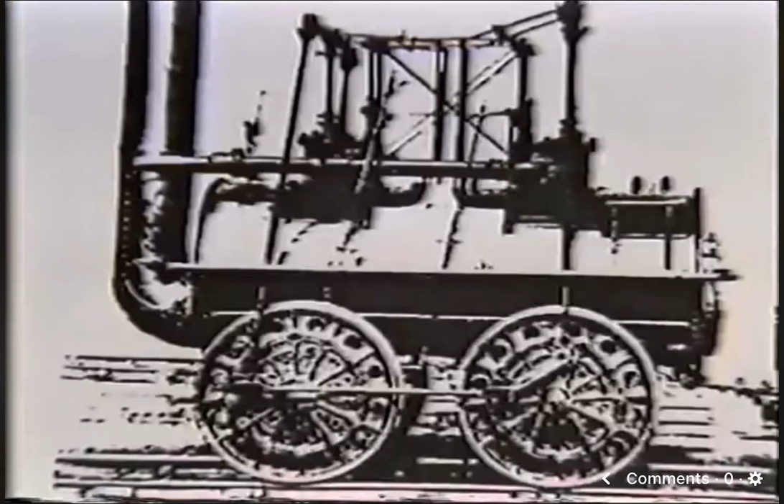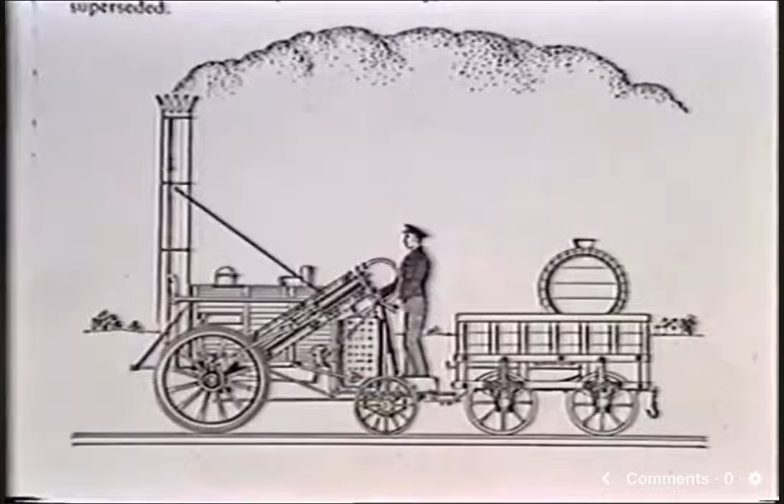Steam. Energy first harnessed more than 300 years ago and refined by George Stephenson and Richard Trevithick to produce the world's first steam locomotives. Stephenson employed John Dewrance as chief erector of his world-famous rocket, and together they made railway history at the Rainhill Trials in 1829.

From pioneering steam locomotion, John Dewrance formed his own company and set about designing valves that would allow steam to be controlled with even more flexibility.

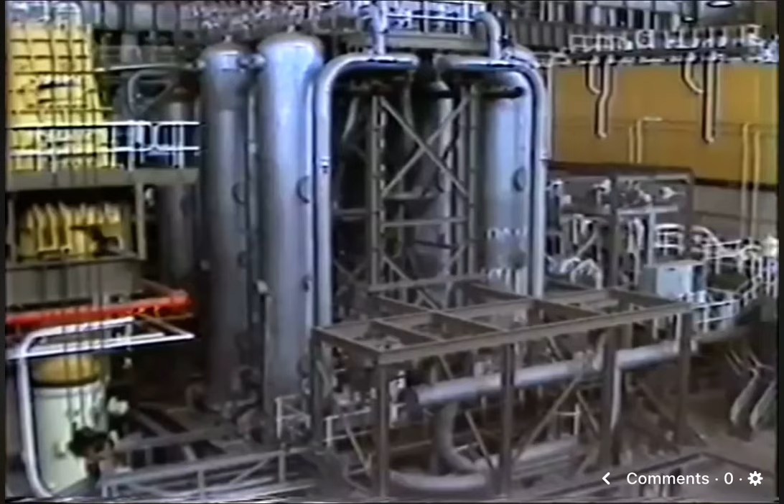Today, the company continues in the pioneering spirit of its founder, and all over the world, people who use steam reap the benefits of his engineering brilliance. This power station, for instance, relies on Dewrance valves for safe and efficient operation, providing the vital energy that lights homes and keeps the wheels of industry turning.

The social responsibility that Dewrance carries to ensure that accidents do not happen is high indeed, and it's demonstrated by a total dedication to quality.

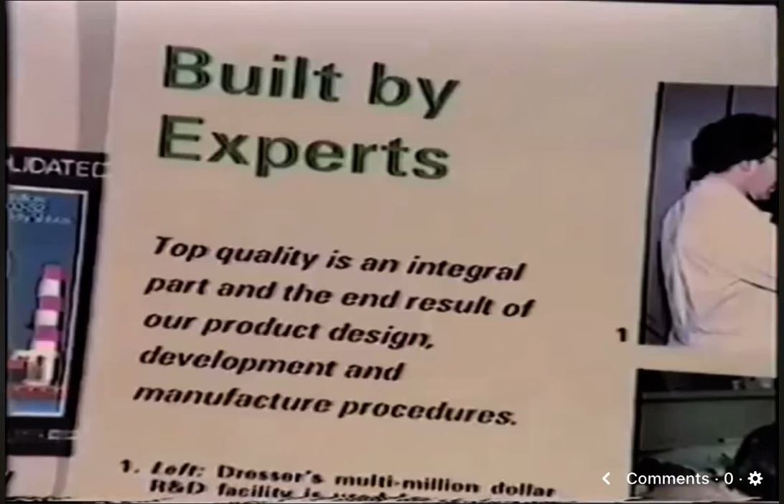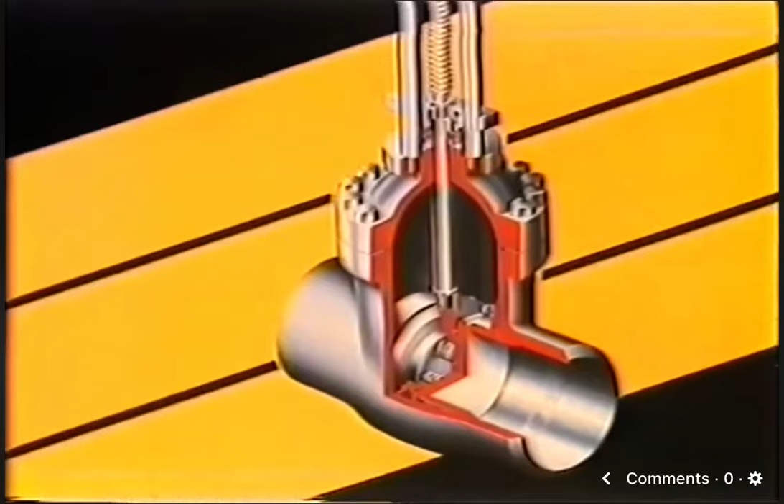From the foundations laid down by John Dewrance, the company has developed a variety of globe, check and safety valves, as well as a range of parallel slide gate valves that now lead the world in quality and reliability.

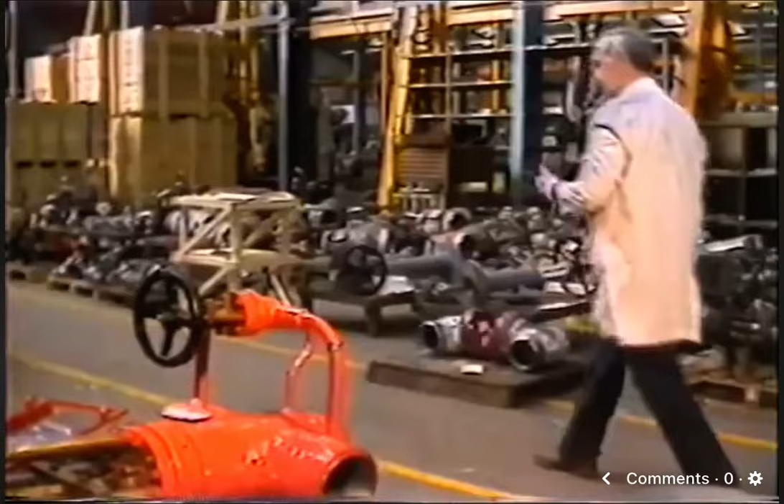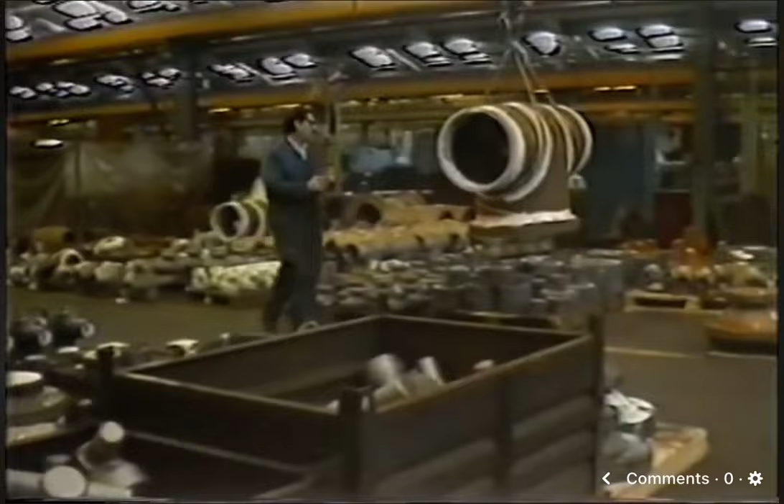It is here, conveniently located alongside one of Britain's busy motorways, that Dewrance are pushing the boundaries of quality assurance to their very limits. All their products are precision instruments made of the finest materials that leave no room for compromise. Dewrance quality assurance begins with the selection of those materials and continues right through the manufacturing process onto installation where needed and on-site service.

This then is Dewrance.

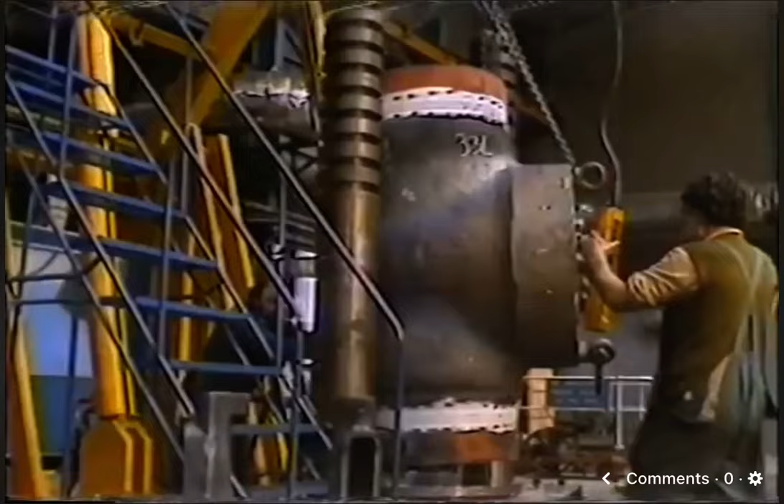Dewrance is now part of the US-based Dresser Group. As such, it belongs to a worldwide organization that specializes in energy-related products, a recognized world leader. The care that goes into the making of Dewrance valves ensures that the company stays at the top.

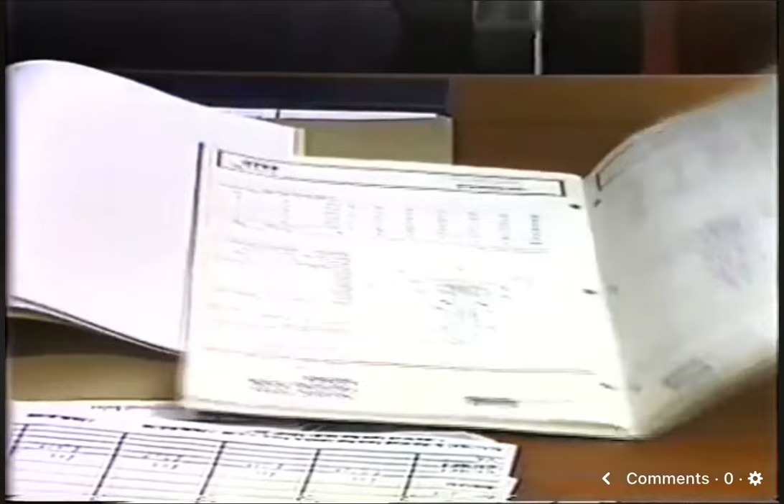A care that starts with the way in which Dewrance deals with its customers. It continues into the design office, where the customer's specifications need to be precisely interpreted into working drawings.

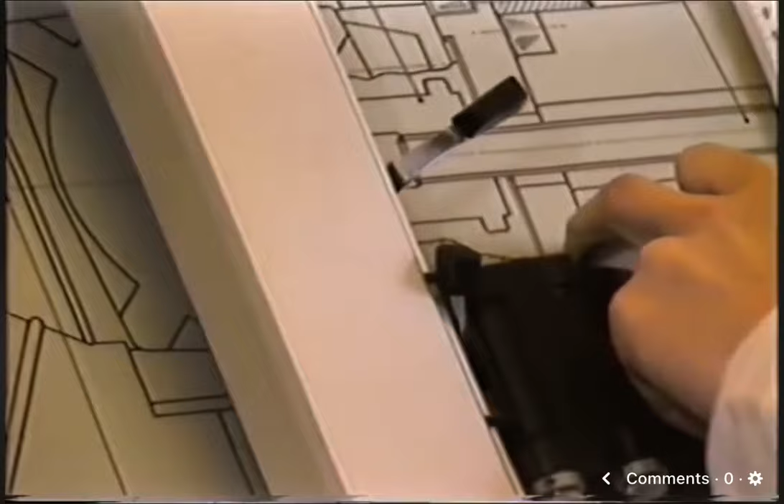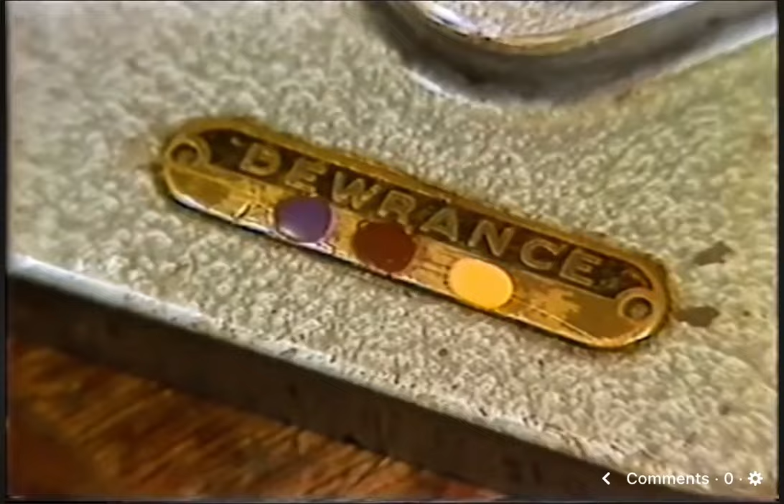And it is evident in the careful calibration of the testing equipment that ensures that each stage of manufacture is checked and double-checked. A simple, fail-safe color coding system ensures that nothing misses its turn. The standard is laid down by the National Physical Laboratory and strictly adhered to.

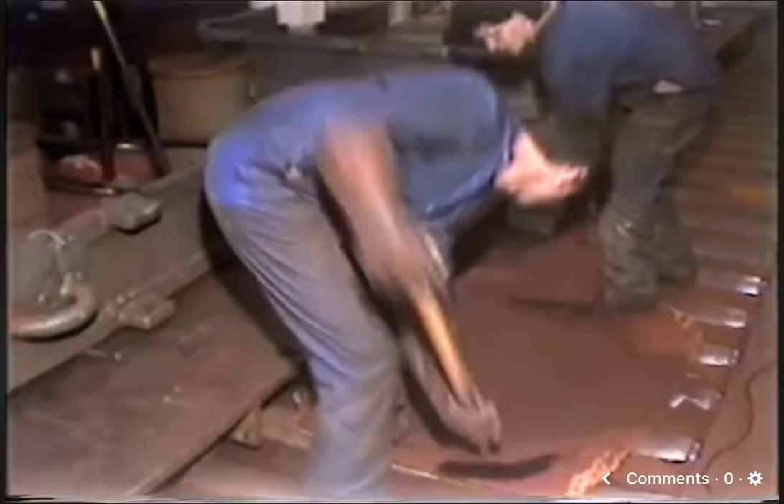Dewrance is a company that keeps all principal manufacturing processes in-house, with just one exception. This is for castings and forgings, and the Dewrance standards are demanded even here.

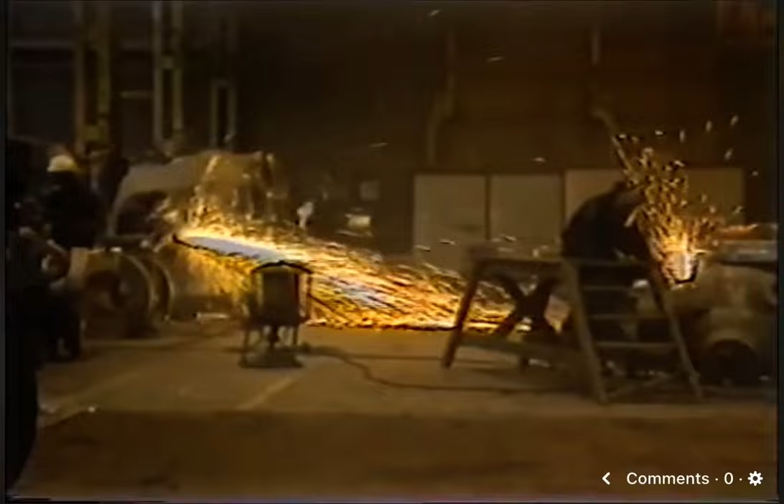The foundry that produces these castings has a reputation for matching those high standards. This area is dedicated to Dewrance castings, and before Dewrance will accept them, they have to go through rigorous and painstaking testing procedures to ensure they're of the right quality and standard. This includes the full examination of the body and bonnet.

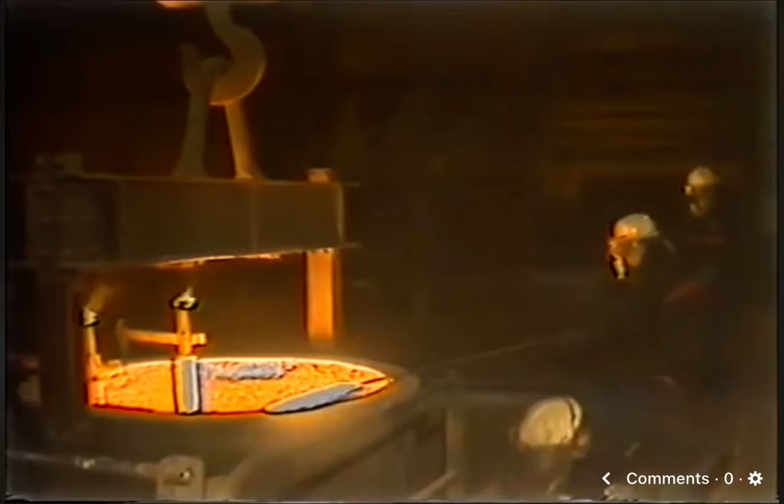Quality can be assured at the foundry, or where a commercial quality casting from stock is to be used, Dewrance has its own facilities to upgrade to the highest levels of non-destructive examination.

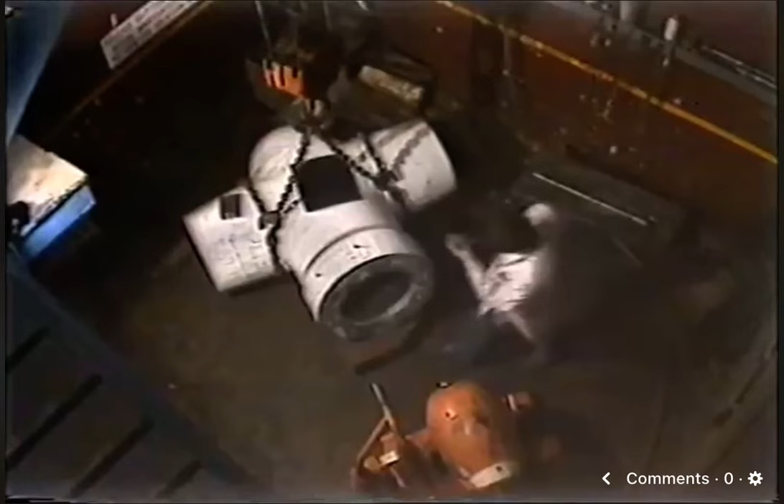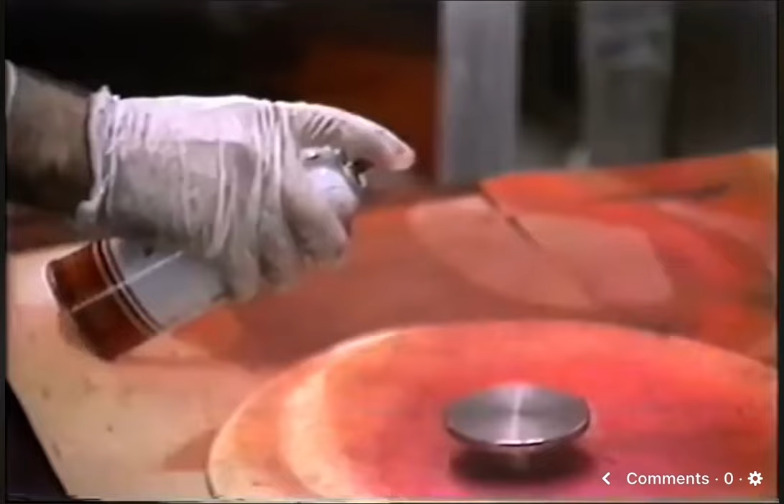Radiography is part of that non-destructive testing program. Ultrasonic testing is also used, as is dye penetration surface testing and magnetic particle testing.

But it is pure skill that ensures this operation is successful.

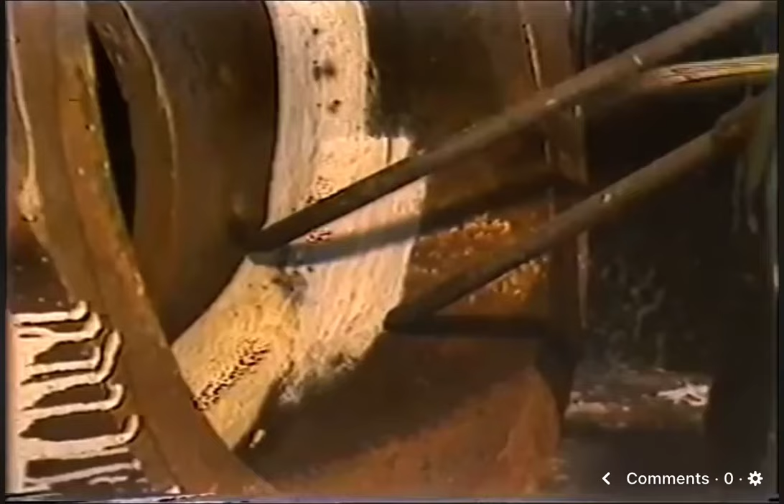The care that Dewrance takes in the manufacture of valves shows itself also in the company's commitment to investing in state-of-the-art computer-controlled machine centers and CAD/CAM facilities.

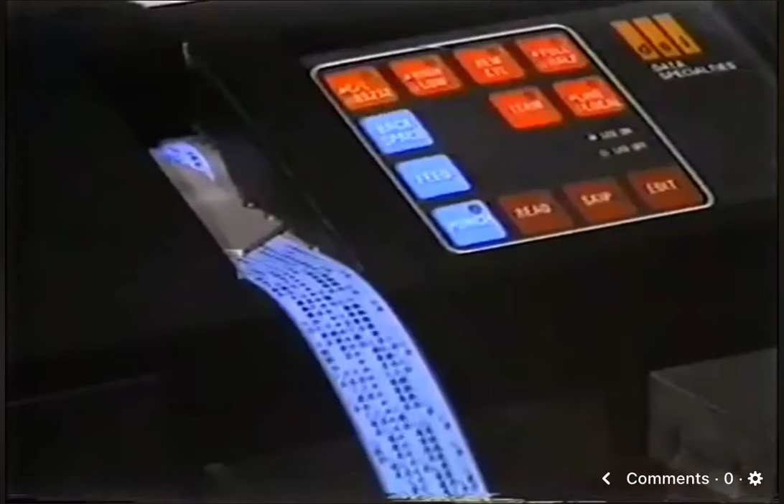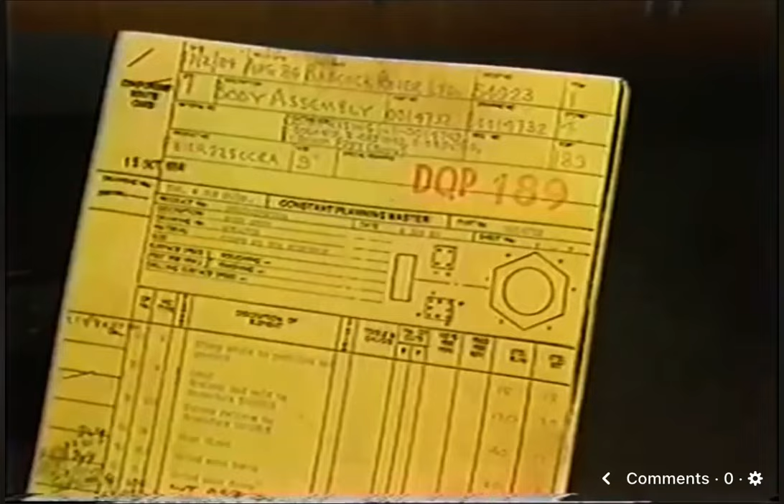It's in manufacture and testing that Dewrance has achieved excellence and a worldwide reputation for products that have built-in quality and reliability. A route card system ensures that every job is inspected at each stage. It means the job cannot continue through the manufacturing process unless authorized by an inspector.

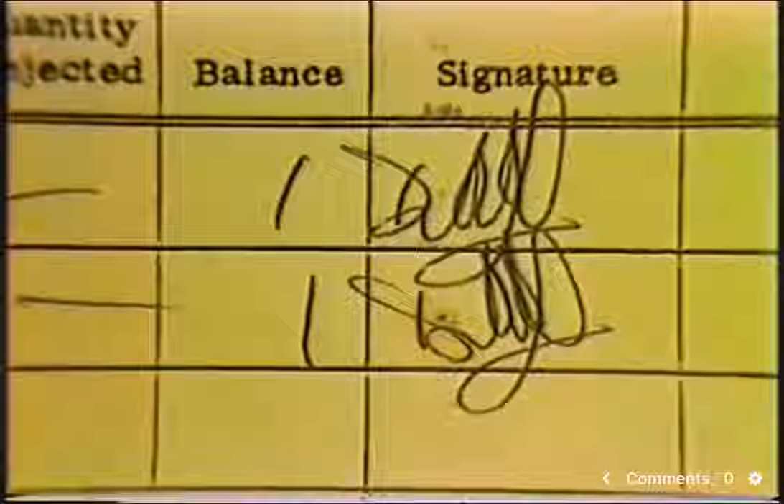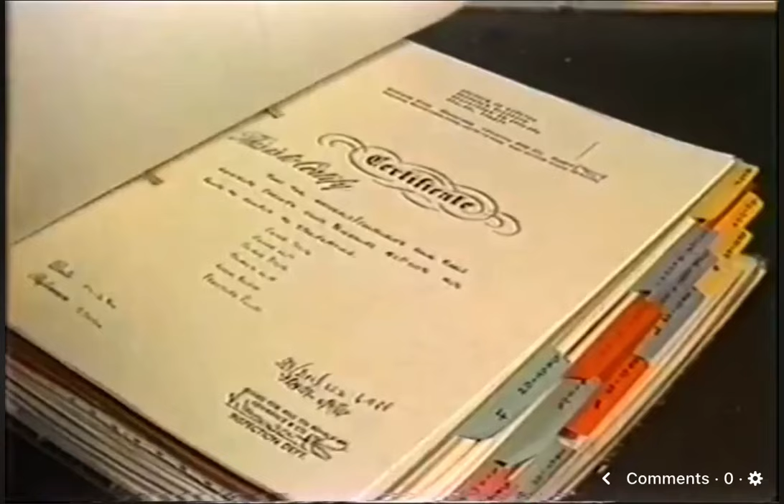Documentation for each and every part is a key element in Dewrance quality assurance. It's considered essential for Britain's Central Electricity Generating Board and Ministry of Defence, renowned for the high standards they demand from suppliers. It's comforting indeed for customers to be able to follow on paper every stage of manufacture.

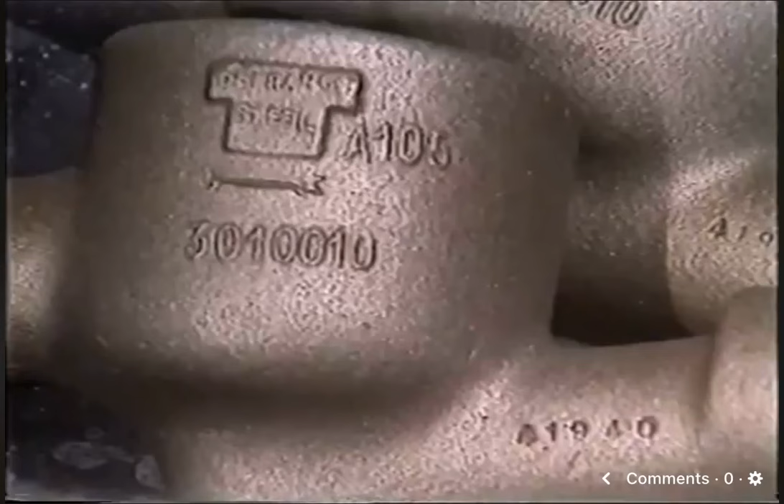The documentation for each valve is so precise that the origin of every piece of raw material can be readily identified. The result of every test and inspection is noted. Here, in Dewrance's own specially developed hydro testing shop, valves are put through a series of leakage tests at pressures of over 10,000 pounds per square inch.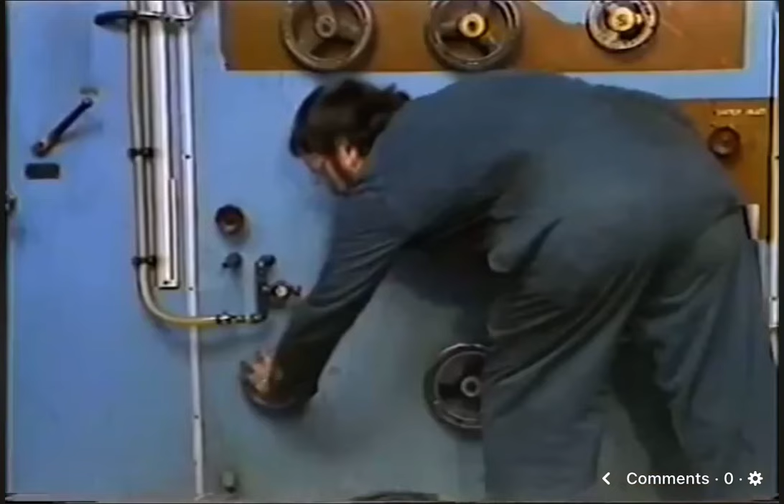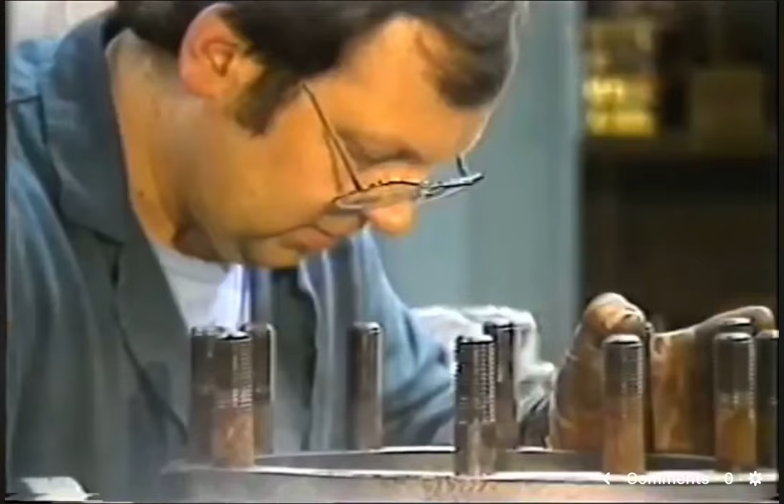But while high-tech items of equipment control efficiency and quality, they will not replace the traditions that result in dedicated craftsmen who care about their work. The Dewrance Apprenticeship School ensures that those craftsmen with their trained eye for quality will always be present.

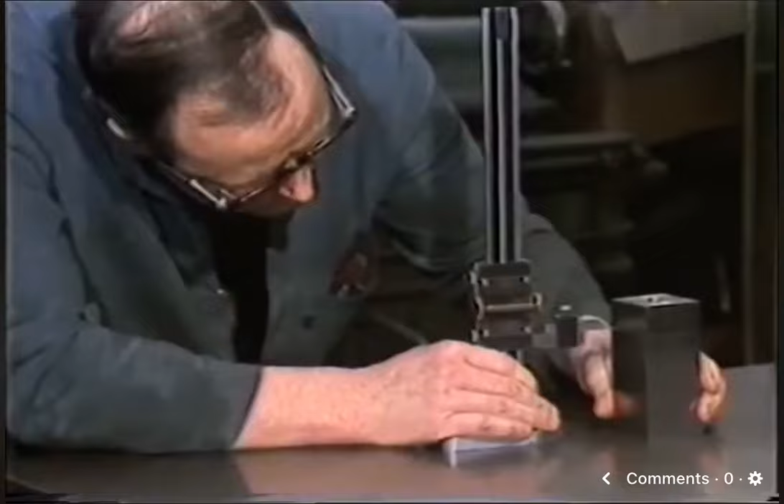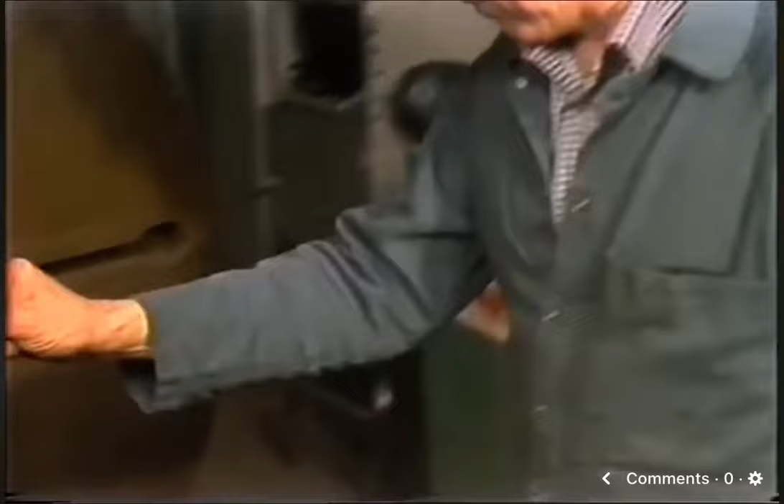Dewrance is justifiably proud of its in-house toolmaking. It openly boasts about having the finest and best trained welders in the world, men who know by instinct that each job is done to perfection, but who willingly submit their work to more modern techniques of quality assurance.

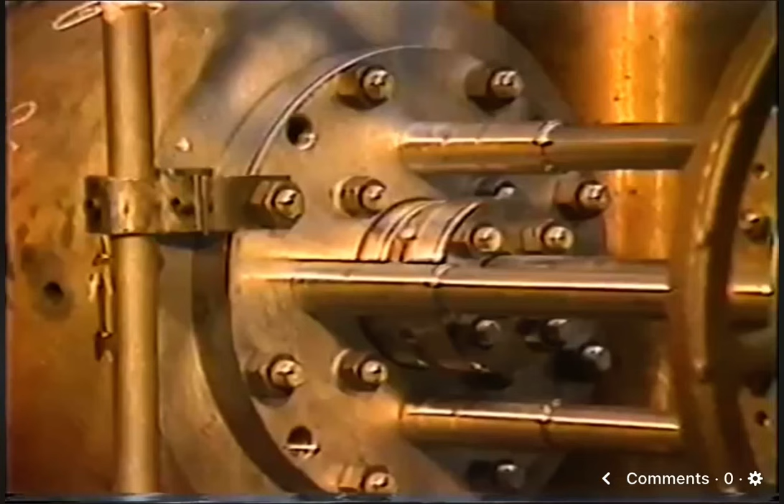Dewrance has turned the building of valves into a fine art. The rationalization of basic valve types has led to interchangeability of components throughout the wide range. And the company has developed its own computer database to allow instant access to valve types for specifiers.

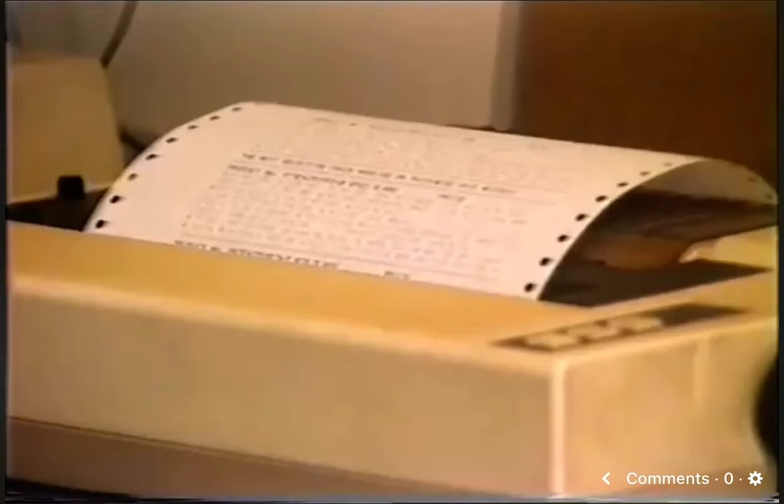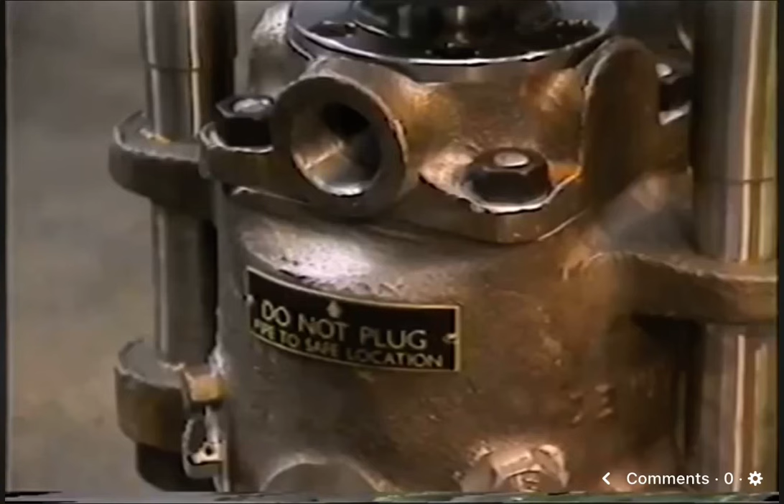Parallel slide gate valves, first developed over 50 years ago, have had to change with the times. Today they have to meet the rigorous demands of both the worldwide accepted American standard and the UK's own British standard.

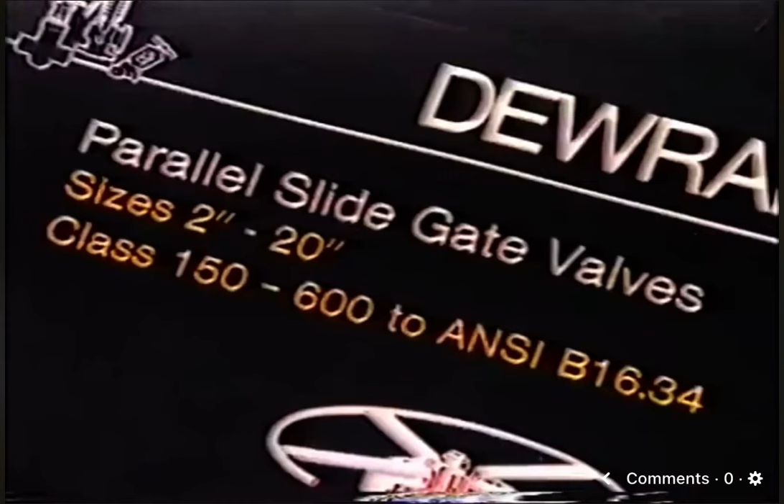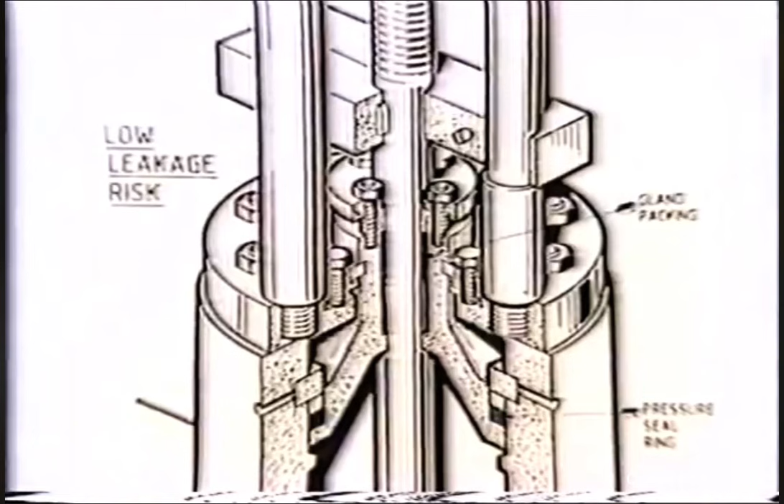Parallel slide gate valves are not only the valves of today, but constant refinements will ensure that they will be the valves of tomorrow. When Dewrance was founded, a pressure of 50 pounds per square inch was the industry maximum. Today's parallel slide gate valve operates at pressures up to 6,000 pounds per square inch and temperatures up to 1,055 degrees Fahrenheit.

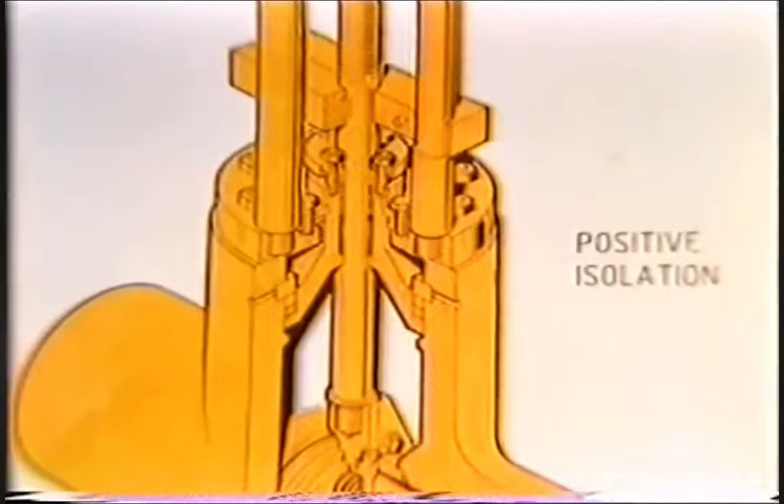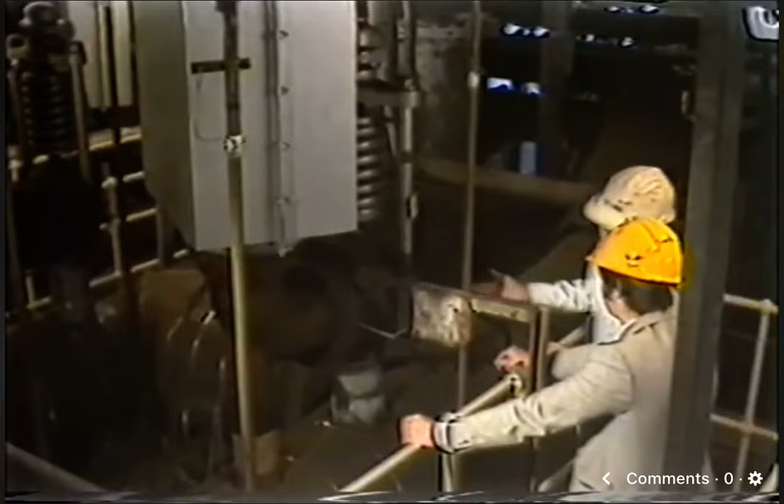Parallel slide gate valves are designed for the efficient isolation of lines in the process and power generation industries, and the built-in features of Dewrance design makes the company's valves world leaders, setting the standards that others copy. Dewrance builds in those standards and goes even further.

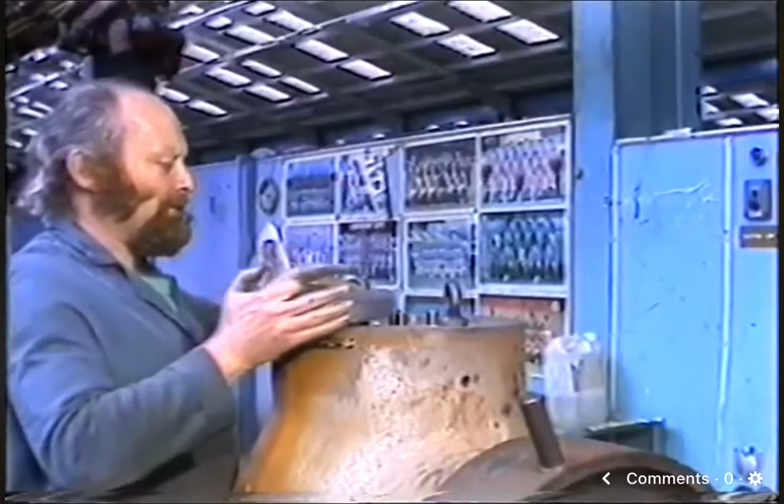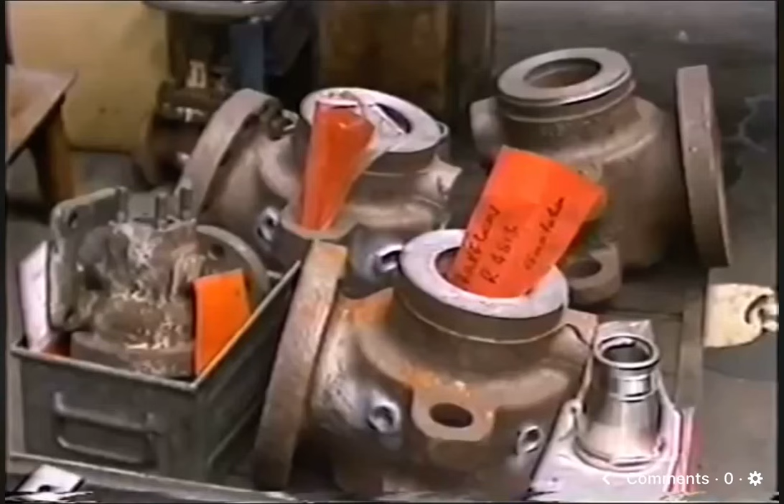Take the valve pressure seal and gland packing, for instance. They're made of asbestos-free expanded graphite, which means leak-free joints and glands, reducing expensive downtime with a seal that's second to none. Dewrance is also renowned for refurbishing valves of any make.

It's all done here, in a shop dedicated to restoring valves to their as-new condition. Dewrance valves are used worldwide. To be sure they arrive in the condition they leave the factory, the company takes pride in its packing.

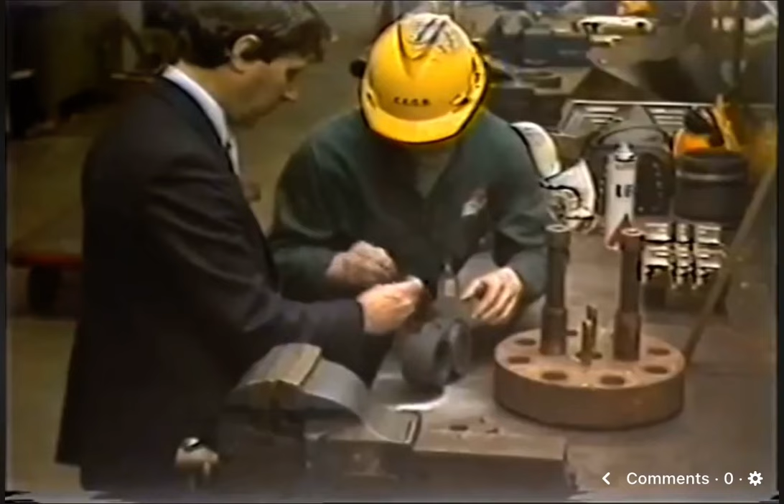And to ensure those customers are happy, the company has its own specialist advice service, staffed by professionals who recognize the needs of clients the world over.

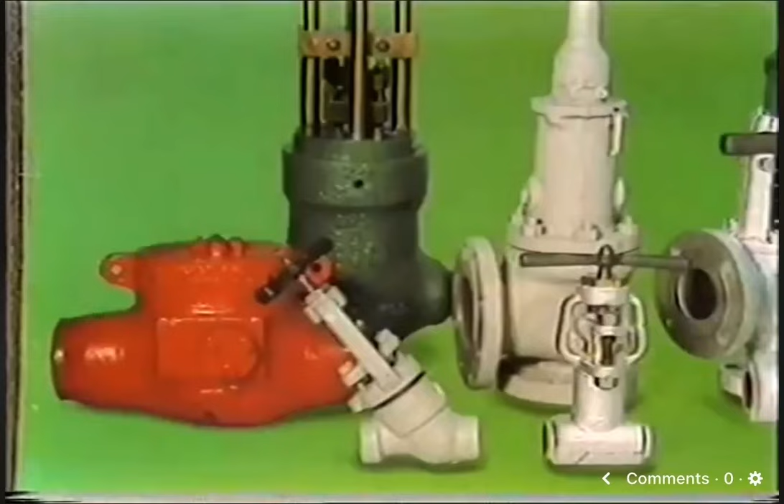Dewrance is a company that is not standing still and is fully aware of the trends in the power generation and steam and water industries. With a range of valves that cannot be bettered, Dewrance will continue to strive for even greater excellence. The company owes it to its founder, John Dewrance, a pioneer in steam management.

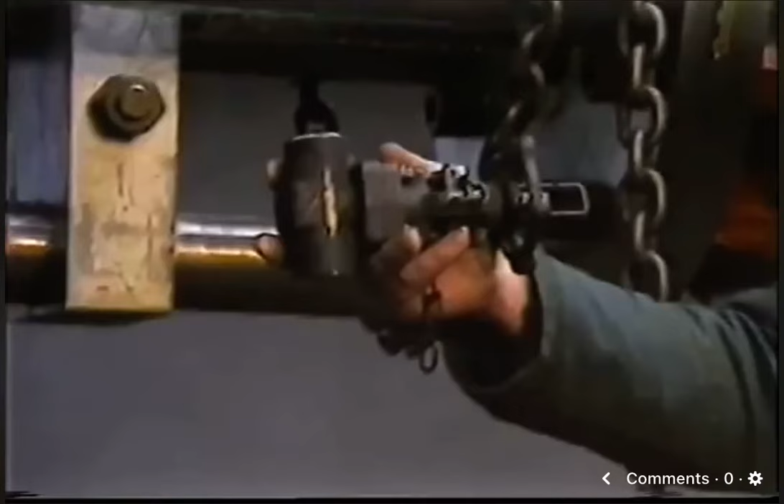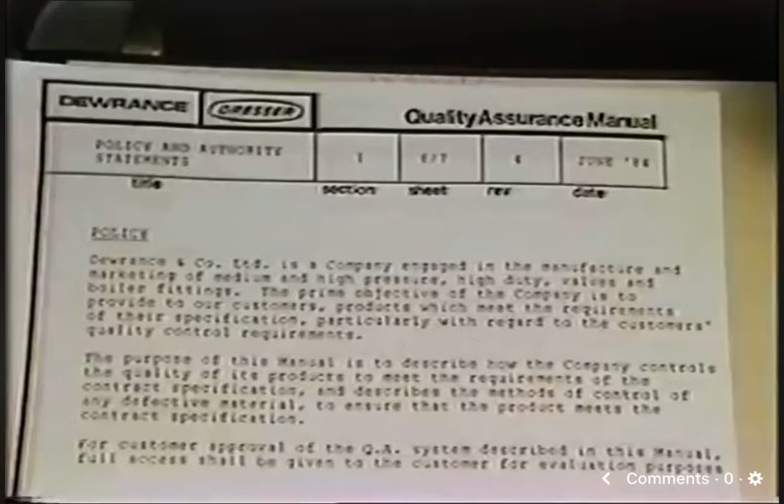Dewrance is in a unique position, a range of standard valves from half-inch up to 24-inch, yet with the capability of catering for individual specifications through innovative design. In all this, Dewrance maintains its high standards of quality assurance and control.

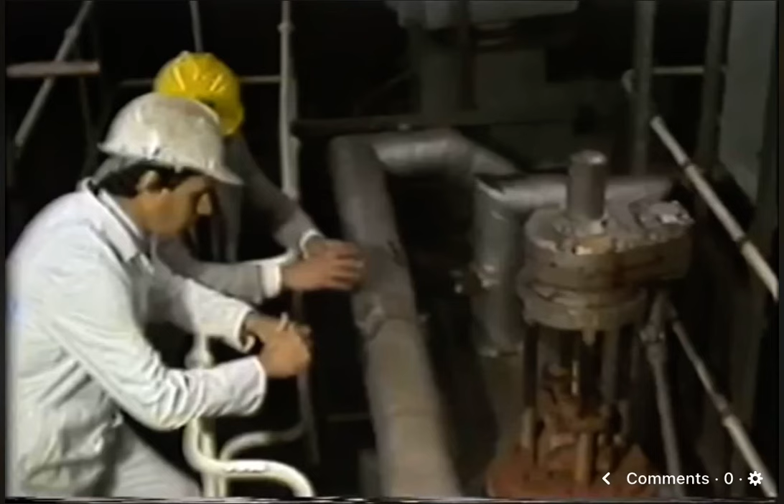As a matter of policy, Dewrance offers personal service in an impersonal world, yet can boast about being cost-effective in a cost-conscious world. This is how much Dewrance care.

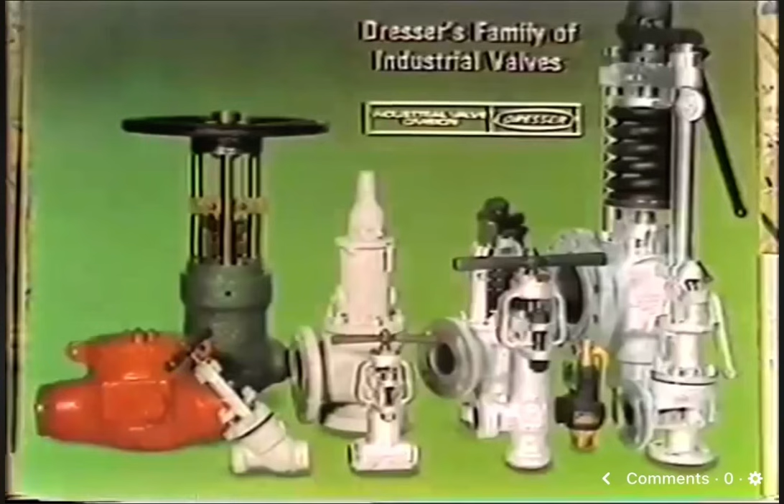Dewrance have been pioneers for almost 150 years. In the manufacture of high and low pressure valves, there is no equal. John Dewrance would have been justifiably proud.